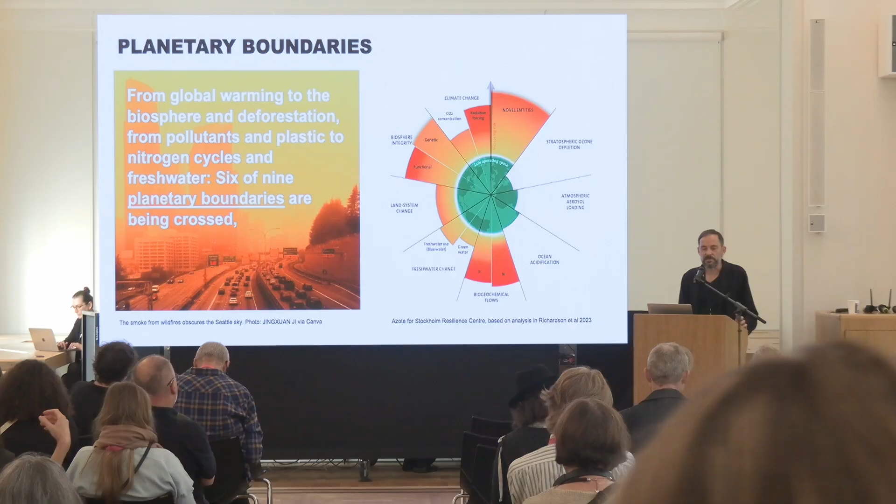And if anyone's still doubting this, then this is what came a couple of weeks ago: the so-called planetary boundaries. By now we've managed to cross 6 out of 9, which means that whatever we did is irreversible. That's something we could all be afraid of, and say, okay, forget about it, this is not going to go well anymore. The emotion could be so overwhelming that we have to stop existing. I think we should really try dealing with it.

As architects, if you look at the United Nations sustainability goals, there are 17 goals. Some of them, you just look at the pictures and already see architecture or built environment in the background. Some of them are more indirect, but most have to do with what architects and maybe designers should be doing, which is providing shelter and livable environments for humans, especially in areas where the planet is not habitable because it's too hot or too cold or whatever.

With the aspect that we have 8 billion people living on the planet, we already started populating areas which previously hadn't been thought of as places where humanity could actually survive. The good thing is that when we train people as architects—and I was trained like this—we are generalists.

We are not good at any particular things, but we have a certain understanding of how things are interconnected, and maybe we, in simple terms, just know whom we should ask. So there's a lot of questions out there, and somebody has to try to break it into different elements and really go and ask the relevant people.

At the same time, this comes from the Venice Architecture Biennale in 1996, when the curator said architects are seismographers of society. And I think there's something true about it. That's why I mentioned Marshall McLuhan before. We are able to shape the environment in a certain way, but we are also inhabiting the environment at the same time.

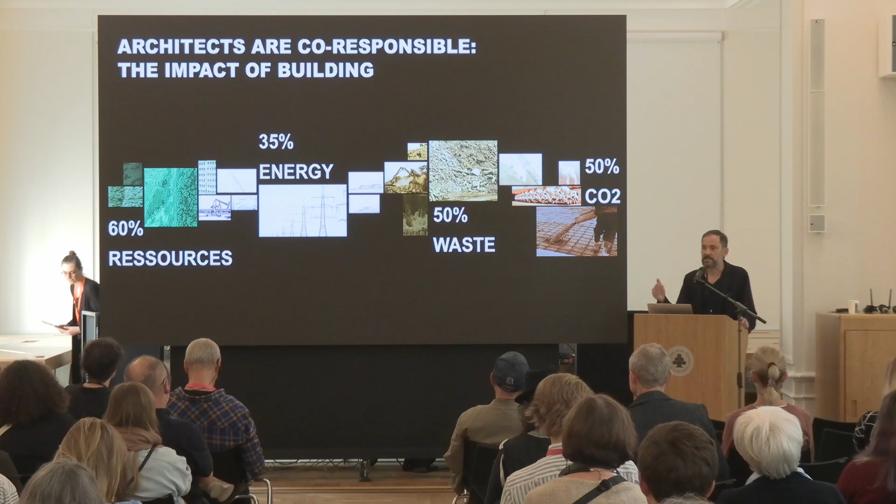So on one hand, we can say that we are also responsible for what has happened on the planet, because if you look at this, anything that's building activity related takes 60% of global resources, 35% of the energy, it produces 50% of the waste that's all around, and 50% of CO2 emissions. So that means there's a big lever here. There's a lot we can do to change that. And we have to - it's also the responsibility.

One of my favorite architecture theorists is actually Cedric Price. And he talked about architecture not about finished buildings, which we very often assume when we look at fancy magazines and so on, but about an ability to enable and facilitate change in a changing world. What he called to think the unimaginable. And that's quite interesting, because we usually think we first have to imagine everything, and anything that can be imagined can also be implemented. But before it can be imagined, it might have to be thought, or maybe we can think about things which are hard to visualize. And that's an interesting way.

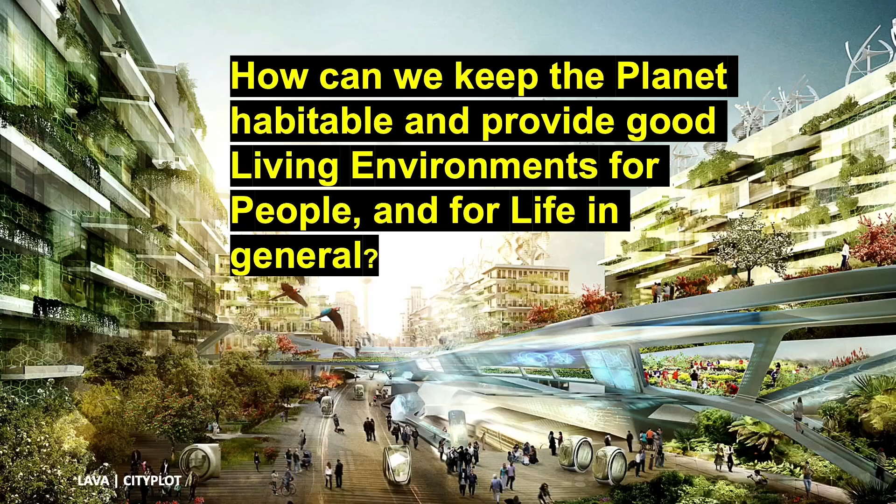So we're going back to the emotions. Maybe it's an emotional reaction to something that triggers different ways of expression, and that allows us to do certain things. So I think today's question for architects, and maybe for designers as well, is how can we keep this planet habitable and provide a good living environment for people? And maybe we have to go beyond this. That's why I'm saying we need to go beyond the Anthropocene, also for life in general.

As you can see here, that's a quick sketch from a couple of years ago. This is not meant to be a realistic scenario. We developed this idea once to explain to people what's going to happen, because modernity very much works on the idea of a centralized order, and also the idea that there's always opposites. So something is either natural or cultural, or natural or technology. We always work with these opposites. But what if there were no opposites? Because in the end, we have one planet, and everything needs to coexist.

So maybe the cities of the future, or the dwellings of the future, need to be something where you can't really draw a line and say up to here is nature and from here on it's human, or this is public and that is private, or this is related to mobility and this is related to growing food. It's just an illustration for this, actually food for thought, to discuss. And the discussion should be: how do we want to live, and how do we want to make this possible?

So one of the things, for instance, we have big discussions in Germany about cars. You know, cars are the holy cows of Germany, our car industry. And everybody wants to be sustainable. So what is sustainability for the car industry? You take a big SUV, exchange the engine from a combustion engine to an electric engine, and then you have something sustainable - you can keep driving, and everything is sustainable. But that's completely besides the point.

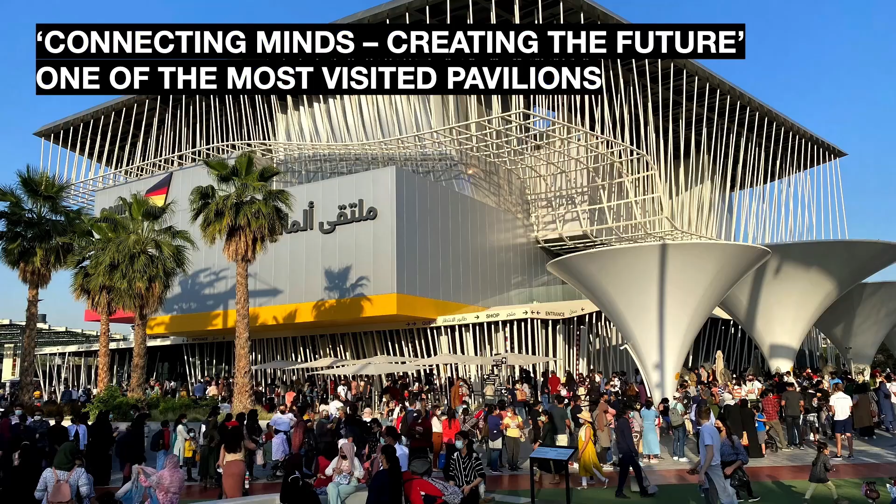One of the things was, once you design it, the question is how would you design it and what's the reason? Well, the reason why we did it is because Dubai is one of the crossing points of the world. It's not far away from India, it's very close to Africa, it's actually very close to Europe as well, and of course it's in the Arab Peninsula. So you already have a place where you can discuss certain things.

And if we want to discuss sustainability and maybe how to do this, it's probably a good place because yes, we should reduce our footprint, and yes, there are other people who have an even larger footprint. But in the end, if we don't convince everybody to work together, it's not going to happen. So that is important to go there.

As architects, for us, the most important thing is to create a space that is open and that reflects these sort of discussions, and is not preconceived, like telling somebody else what to do. This would be colonialism. It's more about being open and saying we have to offer this and we're open for discussion.

So what was nice to see is that, during COVID, when everybody had to wear a mask, the building triggered these interactions. And it became one of the most liked pavilions, where people took their kids to really discuss technology and how it would affect or change their lives. That is something I would say is definitely worth doing, even though it's a building for 6 months that will be taken down.

There's a lot of CO2 emissions, people traveling there and so on. But we should stop looking at everything only in quantifiable means. There is something beyond just the quantities, the hard factors, which you always face in building. Every building has a price, but nobody ever looks at the emotional price of a building, or the quality a building actually should have.

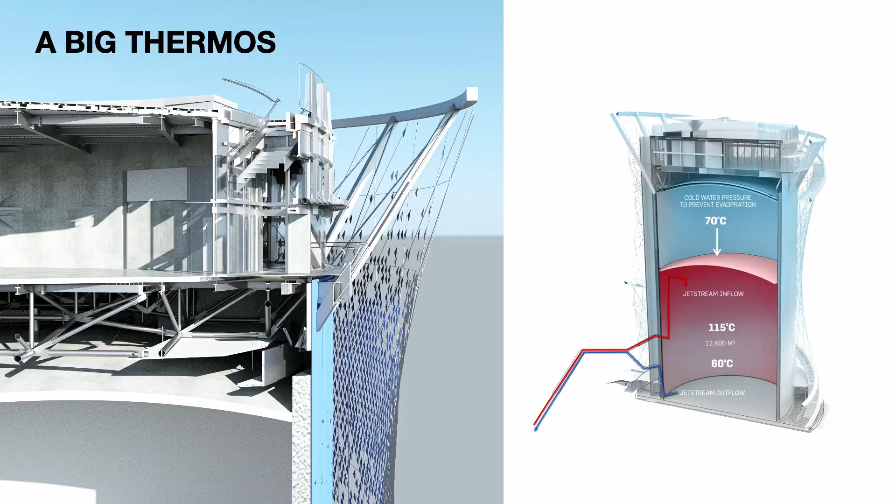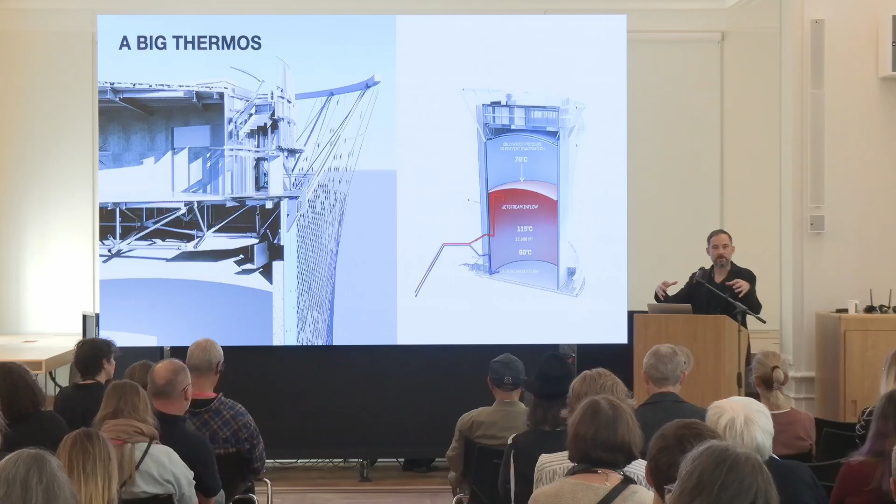This building itself is quite an interesting element. It's like the biggest thermos you could possibly build. There's 115-degree hot water at the bottom, 12,800 cubic meters, and on the upper part there's cold water on top to make sure the whole building doesn't explode. It's a bit like your pressure cooker. The pressure cooker has a big, massive ring on top, but there's no massive ring at the diameter of 25 meters anymore, and then you sit on top of the pressure cooker.

Well anyway, that's a safe building. Our job was how to turn this building into something people would like to experience. So the idea is there's a second skin around the building, and there are elevators as well, but there's a staircase that extends your movement all around. You can walk up, which takes a couple of minutes, or maybe people would rather go down. It's both possible, and that staircase is actually suspended from the top.

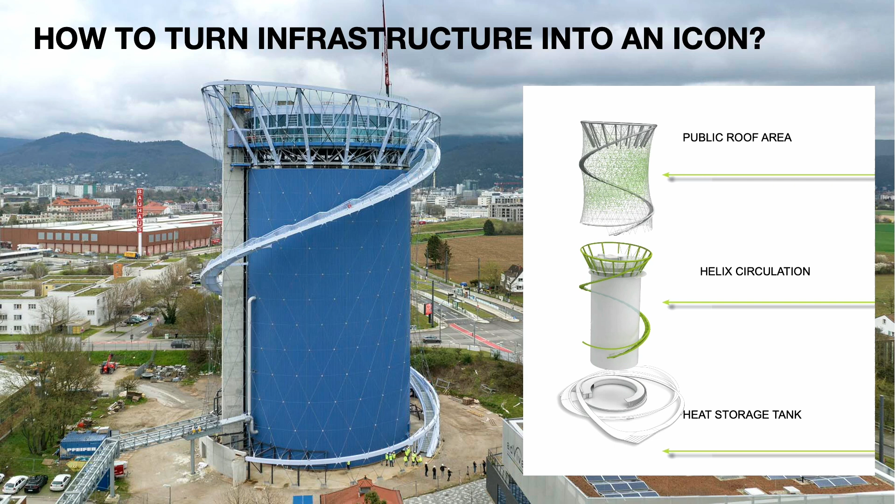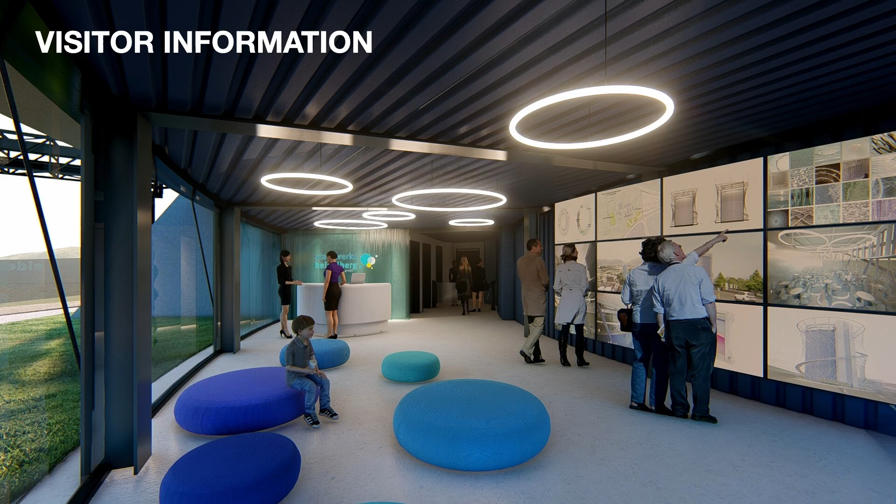So you're actually between heaven and earth, just walking around, watching your city at the time. And of course everything is between this metal mesh - there's also a special facade. At the bottom, there's something explaining how the building works, why you need this building, how it's actually part of why it's important for the city.

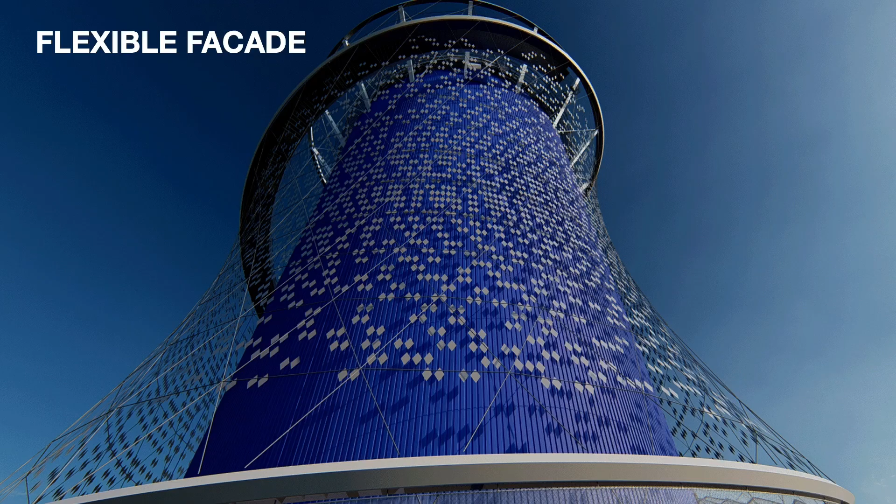This is what you would experience when you're going up there. And in the end, the question still remains, why is that renewable energy and how could we explain that to people? So the idea is there will be a network of smaller aluminum elements that will move in the wind and reflect the sun or the light in different ways, and that reminds people that this energy is produced in a different way.

Okay, you could say, isn't that pure decoration? Well, even if it was, we were looking into using these for photovoltaics. The problem is that putting cables between movable structures like this, the cables would break and would not last 25 years. So there's a problem to connect all of it.

I think we also found an expression that this building here, the silver elements, the diamonds, are still missing - they will be put up soon. But this building also resembles something everybody can be proud of, something that has a positive connotation in their city, beyond just being infrastructure.

If we move beyond this, but it's still part of the Anthropocene, we're still only thinking about people, talking about energy, renewable energy, but not much else. But what if we moved beyond this? We called it planning with nature. What if we treated a building like an ecosystem? So a building is not just a dead object, but something that is alive and works in a cyclic nature.

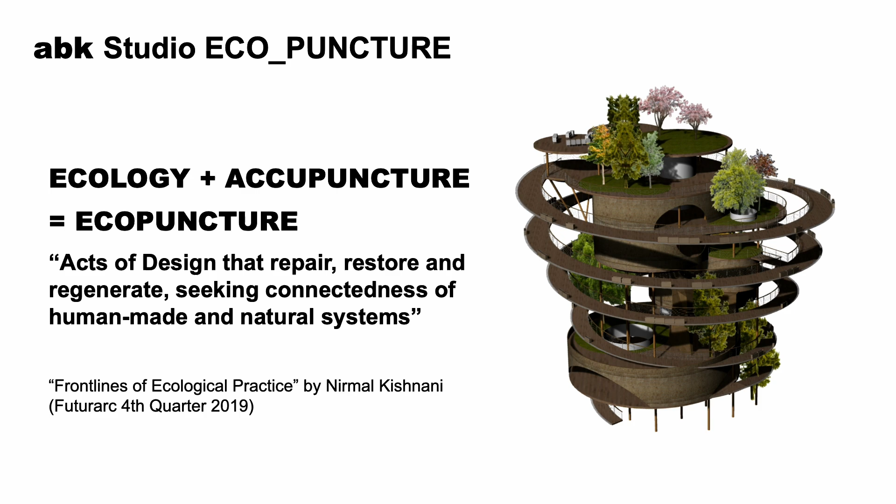At the Academy, we're talking about a studio which we called ecopuncture - the idea of ecology and acupuncture together, and of course with architecture, you put it into ecopuncture. Nirmal Kishnani defined it as acts of design that repair, restore, and regenerate, seeking connectedness of human-made and natural systems. If you read this, you wonder why not every building is already conceived like this, because it sounds so logical that nobody could be against it as a concept.

In reality, that is not practiced very often. So looking at that would actually mean that rather than just designing forms, especially not stable forms that can never change, we should really look at the processes and cycles.

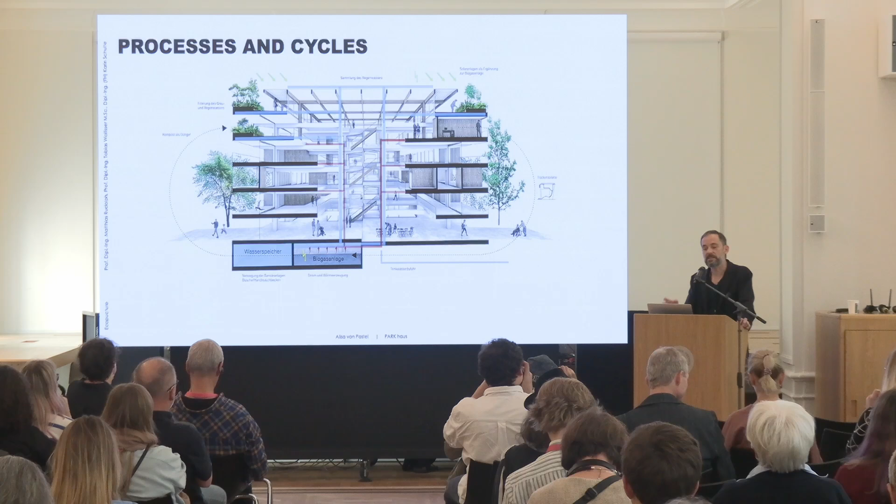Of course, energy and water are very important. The other one is all the resources used for the materials. In Germany, we call it gray energy - energy embedded in the production of the materials. That's why taking things down should really be the last means. Anything that's been put up has a lot of energy embedded, and a lot of potential in that, and we should really first try to deal with it, use it, put it into something else.

So the structure you see here used to be a parking lot. Here, the proposal was to turn a parking lot into small individual housing.

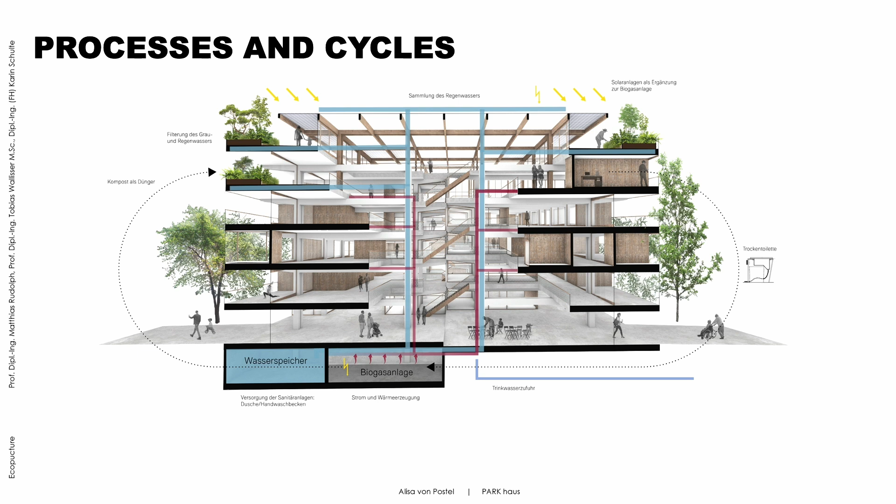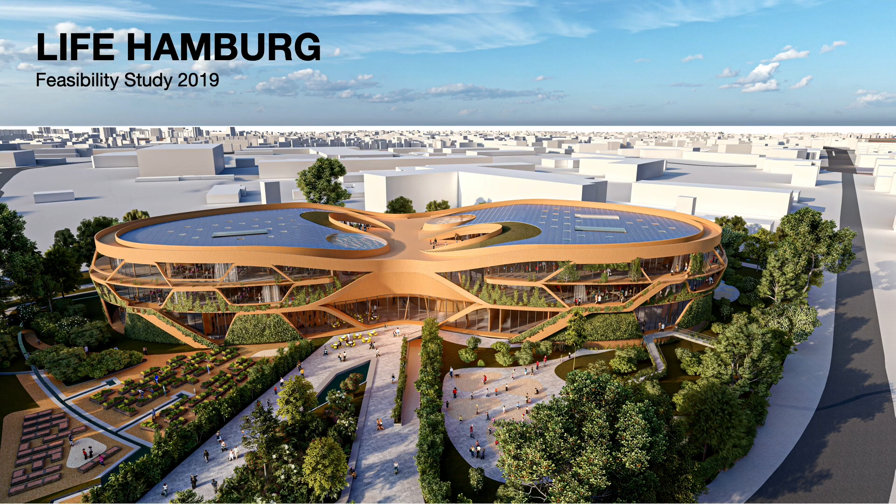So, I'll talk about another building we dealt with. It was called Life - that was not our name - and it's in Hamburg. The idea of the client was actually amazing: it was a non-school, which was already fantastic for us.

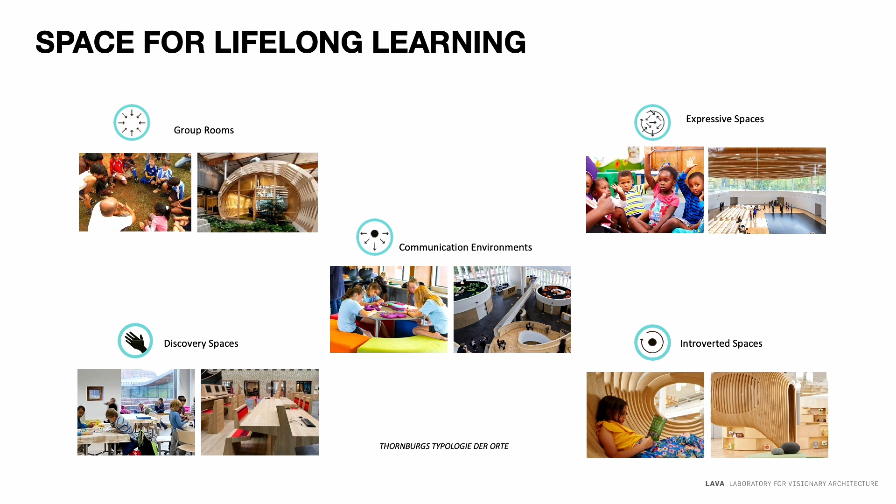The idea is you build spaces for lifelong learning. What does that actually mean? Usually we think learning is what children do - first you go to kindergarten, then school, then university, but then learning is over. Well, that's also a completely wrong conception, as we all know.

I think the great thing of working in a creative way is that all of us know we are constantly learning new things. Like today, we learned many different things. It's really fantastic - that's the best thing about conferences like this, that you learn so much. Everybody learns from everybody else.

So this was meant to be a space for lifelong learning. Once you do this, you do not discuss school rooms or kindergarten chambers, but you can discuss rooms for group activities, rooms for communication, rooms where you can discover something, rooms where you can express yourself, rooms where you're on your own and immerse yourself into something. That's interesting because it frees architecture from preconceived typologies of a space for one person needing to be a certain size with a certain environment.

I think at the end of the day, we all know pretty well how we want to do certain things, so it's good if there's more freedom for it. So we responded to this brief by saying, okay, we do not start with a gridded system and some boxes of certain sizes, but we design qualities.

So we say, okay, there are areas which are more related to green, areas more related to light, areas more related to being on your own. And of course, you can mix everything - you can be on your own in the light, in the green, maybe.

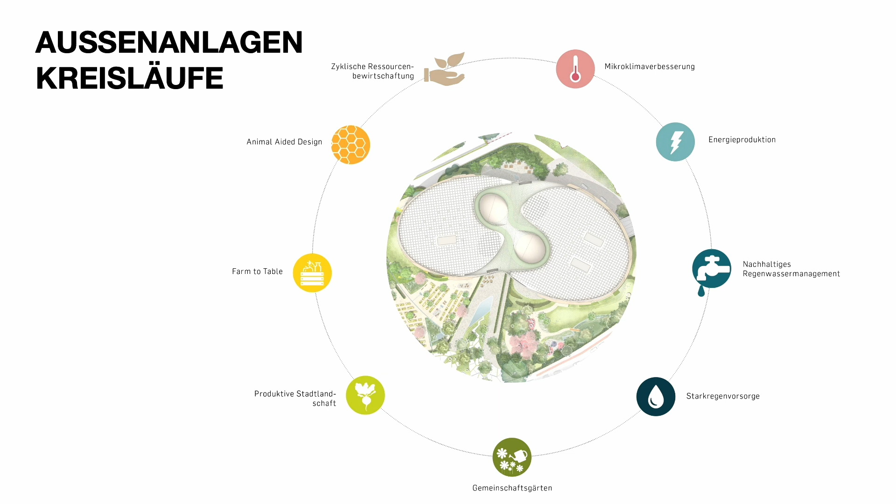At the end of the day, you start to think about, okay, we have water in the building. Where can we collect water? Where can we harvest energy? And how would we make this also, well, it's a house for lifelong learning or space, so you should also express it. So the entire landscape is designed in such a way that you can follow the water that comes from the building.

What was nice here is that the client wanted to have a green roof, just like that, you know. And so we said, yeah, you can have a green roof, but in a city like Hamburg, maybe half of the year you could be outside on the green roof. Plus, you have a very big garden anyway.

Why would you not put photovoltaic on the roof and generate all the energy you need in your building? You generate on your own roof. And of course, we still made it accessible at the center.

But that became the next story to say, okay, what does a building need to do? It creates comfort, but we can do this by reducing the amount of carbon that's needed. So there's usually two things. The gray energy, so what do you put into the building to build it.

We decided to have a wooden building for that, because the calculation is still that there's carbon stored. Of course, it's also not the solution for everything, but that's one thing. And the other one is that the building needs to produce as much energy as it uses, to have a building that's actually...

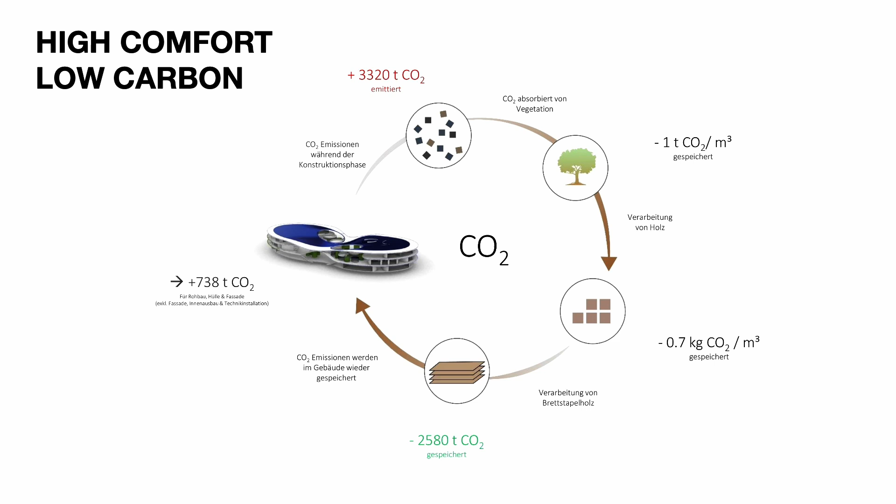...that can regenerate itself. Because most of the buildings we're building as architects are like patients in an emergency hospital. They have all these pipes running in, and the moment you stop the pipe, the building would not function anymore, or would actually deteriorate.

So the idea is that we design something with the ability to propel itself for a much longer time. Of course, this is still in theory, it works much better because we don't know how much sun we will harvest, how we can, you need a storage element and so on.

But at least it should be our aim that whatever we're doing makes the world better, and not the world better here where we are with the burden or the rucksack, or whatever we want to call it, in the so-called global south, but really as something which works with its environment and is deeply rooted in this system.

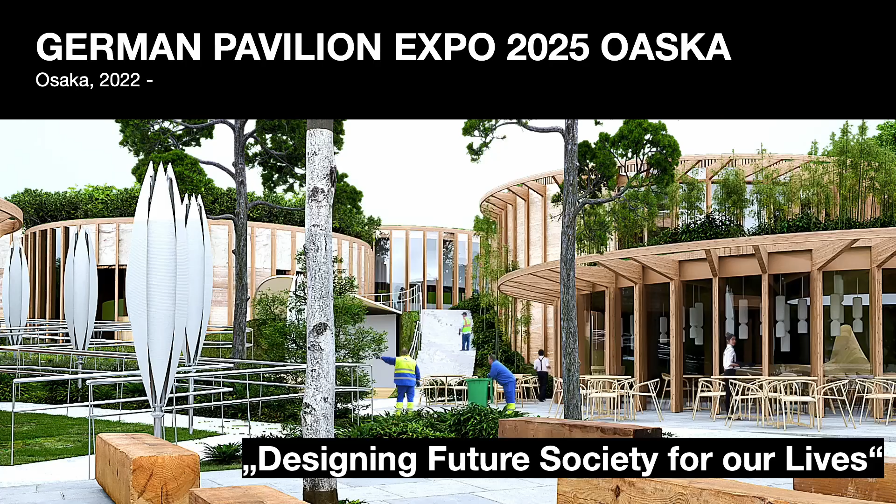So the next pavilion, we're back to another pavilion. We won the competition again for the German pavilion at Expo 2025 in Japan. The motto of Japan is designing future society for our lives. It's quite vague, but at the same time, it also deals with it—like, we're not just designing a building, we're also designing something which has the aspect of community and society.

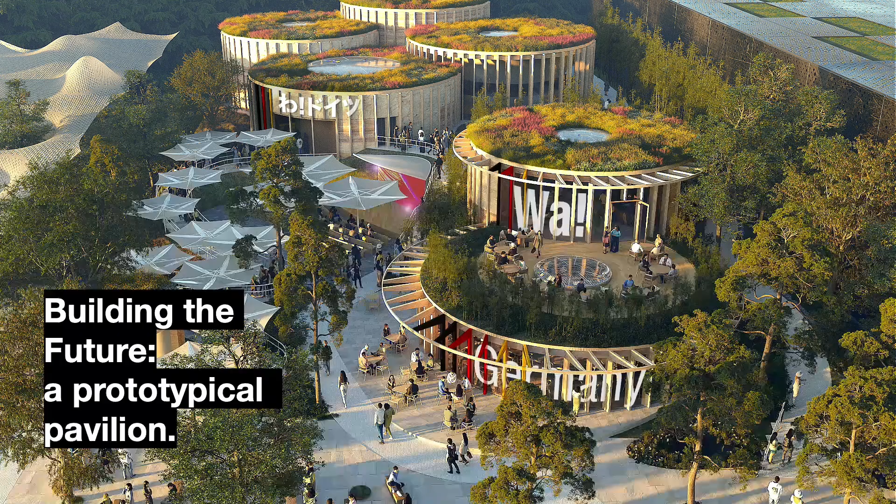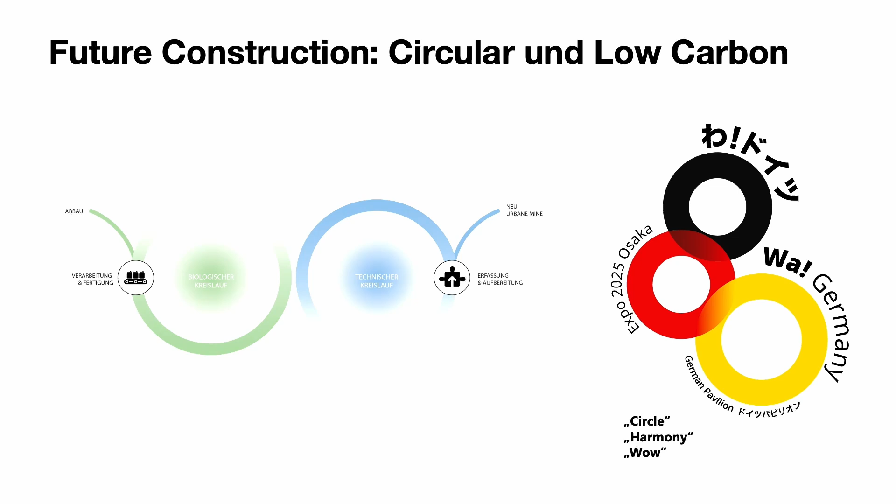So our proposal for the building was that if we do anything there, this pavilion should be like a manifesto. It's a designed manifesto, a prototype. And of course, what's the topic of the time is actually circularity, like a building which you can erect.

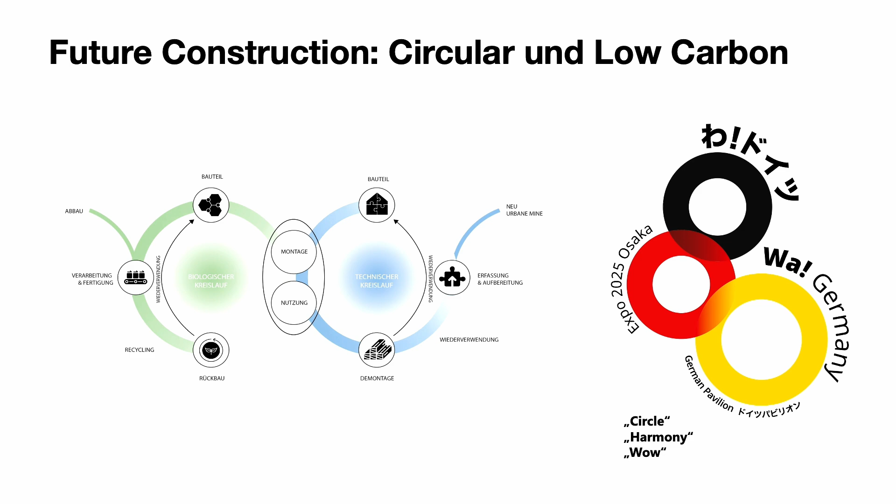But you can also take down with a minimal amount of waste, ideally no waste at all, and you really reuse the materials. This building will only be there for 6 months, so the question is, what's the afterlife of the building? Previously, people built buildings, shipped everything there, and in the end it all ended as landfill, or it was sort of reused.

So anyway, most materials used to be, maybe with the exception of valuable materials, just dumped for landfill. But this building needed to be completely different. First of all, the medium is the message. So the building should really integrate architecture, exhibition, and the landscape.

And the landscape again, not only the life of plants and animals, where plants, animals, and humans come together, but also a hardworking piece of infrastructure. At the end of the day, this is an exhibit we already had in Expo in Dubai.

But here the idea was really to show people all the facets of the planet and what emotions that creates. Because then people really realize there are a lot of other species around which are not that different from us, and they have different needs and so on.

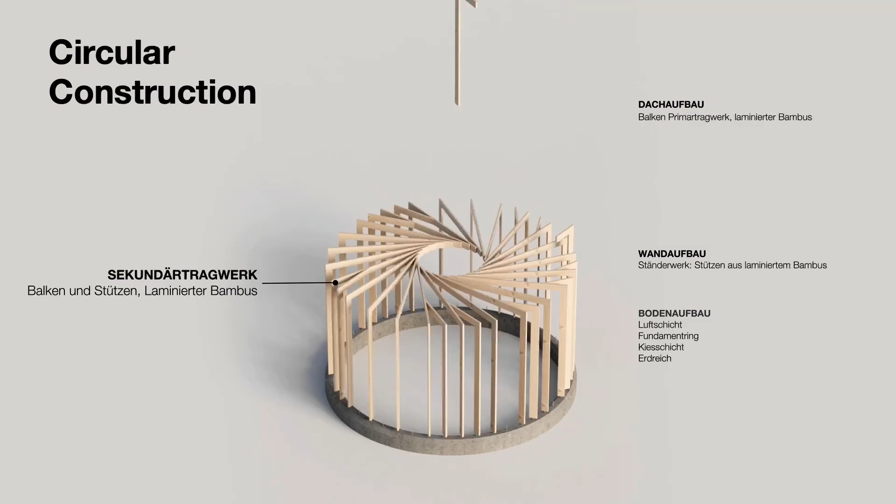Going back to circular construction. Circular construction actually means not that we build circles, well we did that as well, but that we reduce the amount of material to the absolute minimum, that every material, we do not use composite materials. I know it's very hard in industrial design. No composite materials, and all the connections are done in such a way that you can disconnect or disassemble as easily as possible, and reuse whatever you have.

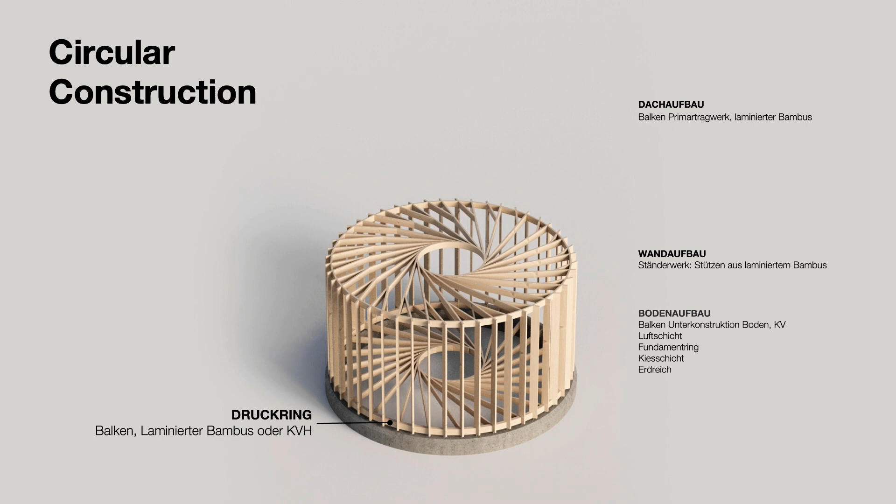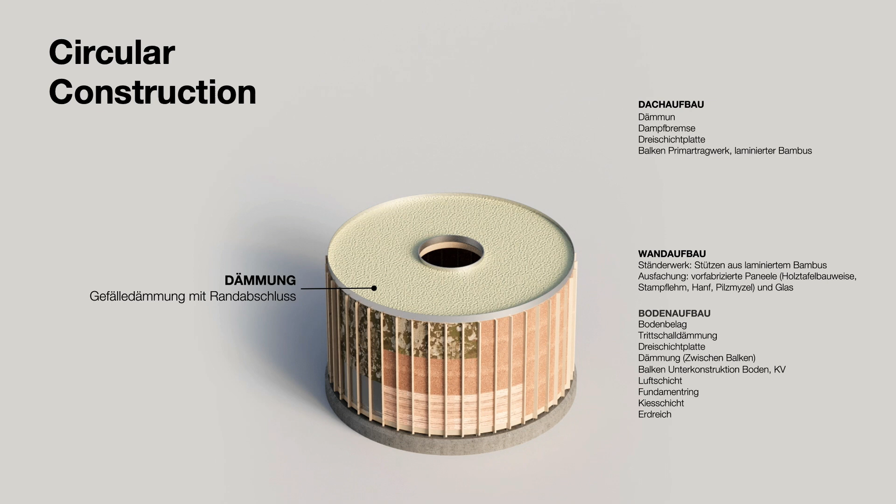That's quite difficult because at the end of the day, certain shapes and forms are not possible anymore. So if you design the building like this, that impacts the language, the pattern, the dimensions, whatever you want to call it. In our case, the building has a relatively simple shape. Everything is sized to elements which are easily available and can be reused afterwards.

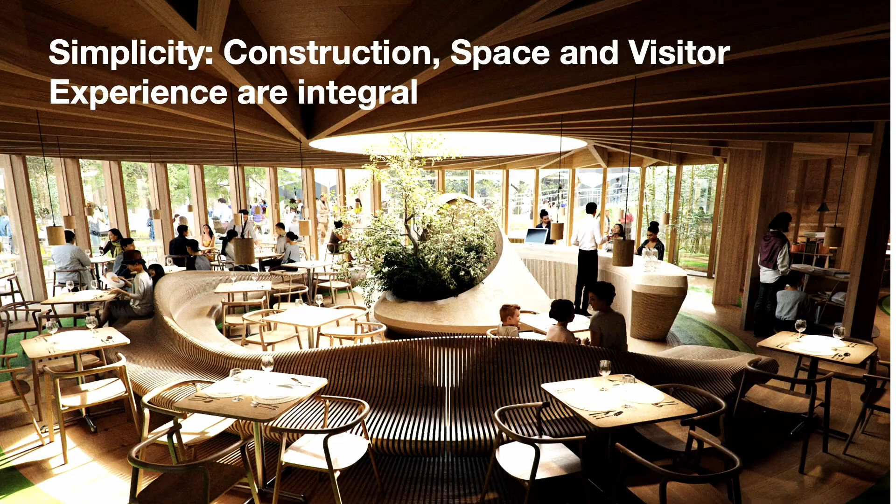But the simplicity might also become something quite nice. There's no suspended ceilings, it's really reduced to the bare minimum. Everything that's structurally there is also visually there. It's only a very limited palette of materials, and the colors also come from the materials. So it's something simple, but at the same time creates a comfortable space that appears natural.

Going back to the landscape as an ecosystem, we collect all the rainwater. We also use the water from flushing the toilets. There's this sort of external purification plant, so the whole building becomes a landscape where we just hire the plants.

The plants come from an existing nursery. For 6 months they spend time at the expo, and later on they go back to the nursery. That's the only way to have bigger plants in this landscape in 6 months' time, and also make sure they're taken care of in the best possible way. So they basically stay in pods, with just grass and certain fast-growing elements connecting the other elements.

So at the end, we hope that we can show that even for a building that only lasts 6 months, we can do something that has a lasting impact on the thinking, thinking in cycles, and maybe changing our priorities as a designer. It's not the big gesture we want to make, it's actually something which works in a much larger picture.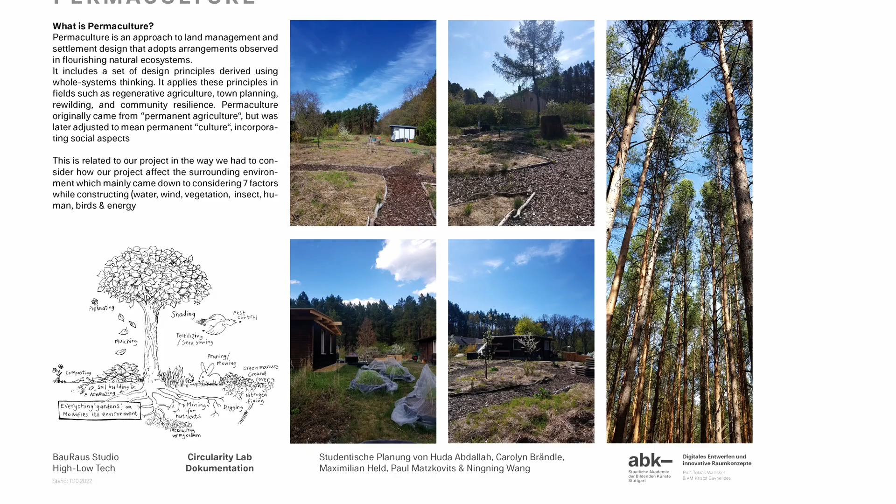So we built something we called the Circularity Lab. That was the summer project last year, where we started looking into permaculture, different ways of living within this world, feeling as part of the world. We are not, as humans, outside nature—we're part of nature.

So once you understand that, you also design in different ways. So what did we do with the students? The first thing is we went out to a Brandenburg site, a large plot of land which my wife and I own, where we have a permaculture farm. And the first thing the students had to do is put up their tent.

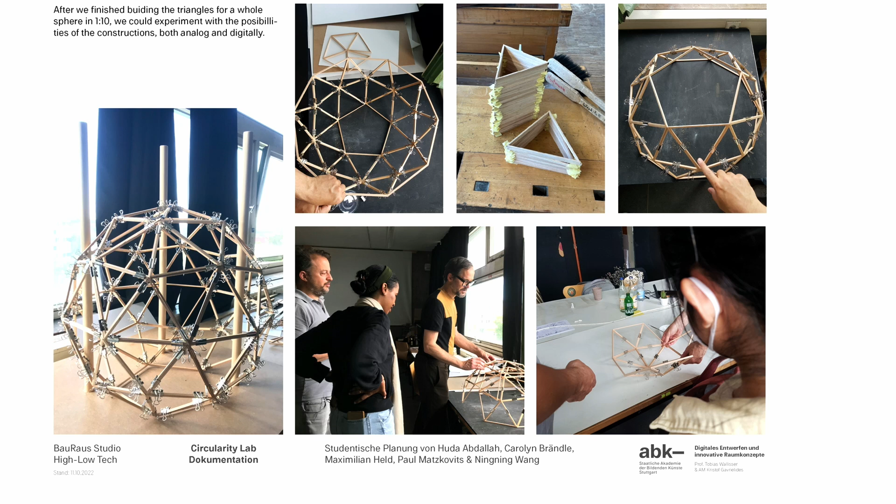So that's the first thing—you create the space where you're going to stay for the next week together. Then everybody was cooking together. Everything was rather simple out there. And we developed a structure for the space out there, starting with relatively simple elements, things we could do ourselves.

We worked with mycelium as a growing material. I'm sure people have done projects here using mycelium. It's a revolution in the sense that material is not dead matter—you see how certain things grow. The idea is that things could grow further, you can repair it in a completely different way. It gives you a completely different understanding of what material could actually be.

We also worked across disciplines—with the textile people to develop a fabric which we could span into these triangular structures, bringing together different ideas and old techniques. I think architecture or building could be very much about low or no technology, or traditional ways of doing it, in combination with more modern ways.

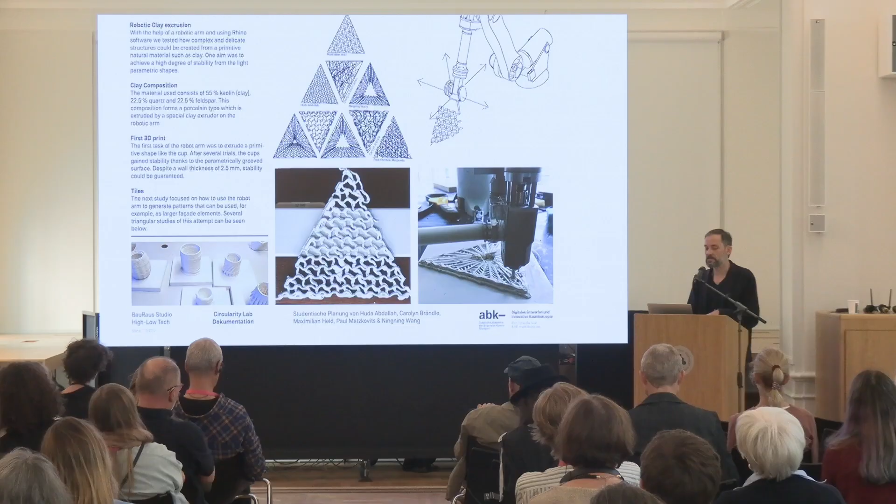So we also used the robot arm to 3D print ceramics to get some openings into the mycelium patterns. Most of the work was actually dealing with the wood—a lot of work for something very simple—creating all these triangles in the structure. But the great thing was we could all do something. Everybody could contribute, so it was a collaboration, and it was also participation.

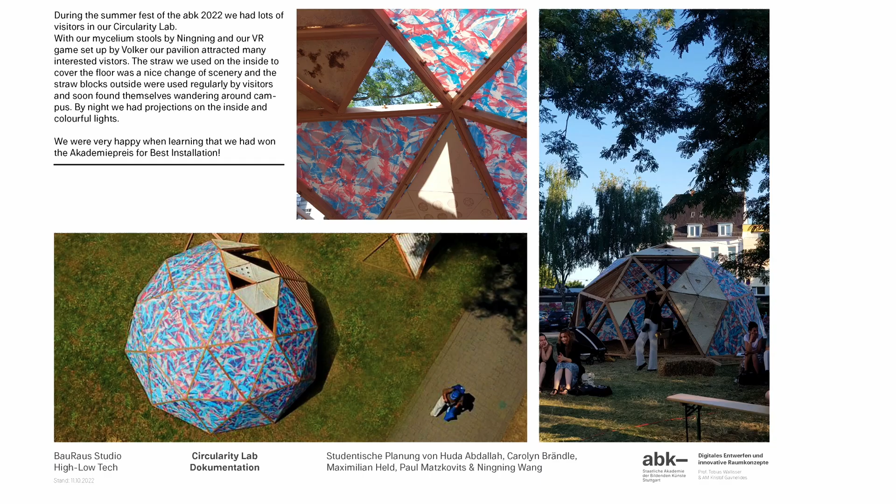That's the difference. If you design something as architects for clients, you have contractors or craftsmen doing the work—it's all very indirect. The great thing about something like this: you build something, it's your own, you are your own client, your own contractor, you're just doing it and you're doing it together. That was really a fantastic experience.

So at the end, this is what happened at the opening of our summer show. We just had this pavilion out there and people came to have a look at what that actually is. And then the students could explain how it was actually built and what the reason for it was. That's the great thing—you create curiosity, and that allows people to really start a conversation.

And these conversations hopefully have the potential to change something. It's not the buildings that change something—I think it's the dialogue between people that build something that changes the world. Hopefully this is actually my last slide. So I think to go back to modernity—and I've been fighting against modernity all along—we go from the famous 'less is more' to actually 'more with less.'

It's not always that less is more, especially if it's just from a formal reason. I think we all have to create more with less—more fun, more collaborations, maybe more emotional, while using less material, less resources, and less measurable things to do that.